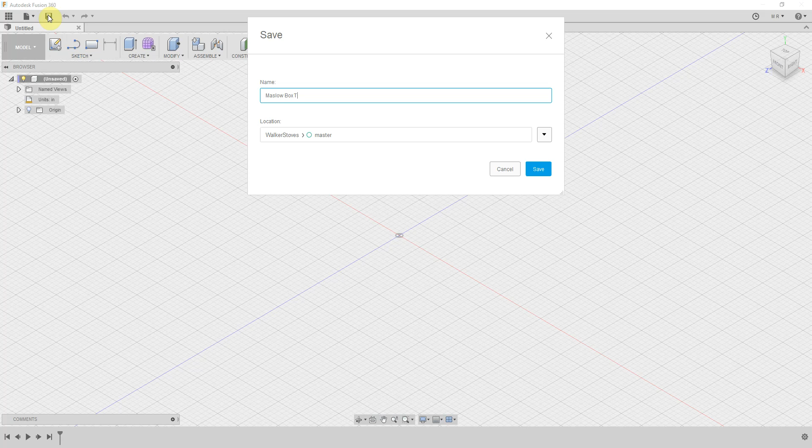Okay, so we've got nothing going on here, starting from scratch. There's a couple ways to go about this - you can start just by making a new component that is your first panel. I've done it a few different ways, not sure what the right workflow is, but I've been starting with a sketch, then creating a body, and creating a component from that body. So I'm going to work from there.

One thing we want to start with - it's really easy if we keep our Z, in my opinion, pointed towards me, because then when I get to the CAM stage, that's how its contours are going to look. So I make it so front Z is pointing towards me, X and Y are just as you'd picture, horizontal and vertical. And that's how it defaults.

So here we go, we're going to start and make a box. The first thing we'll do is go up here and do a 2-point rectangle. If you go into the sketch, you can select rectangle 2-point, or just click on that icon - either way. And before I start, we should talk about preferences, I suppose.

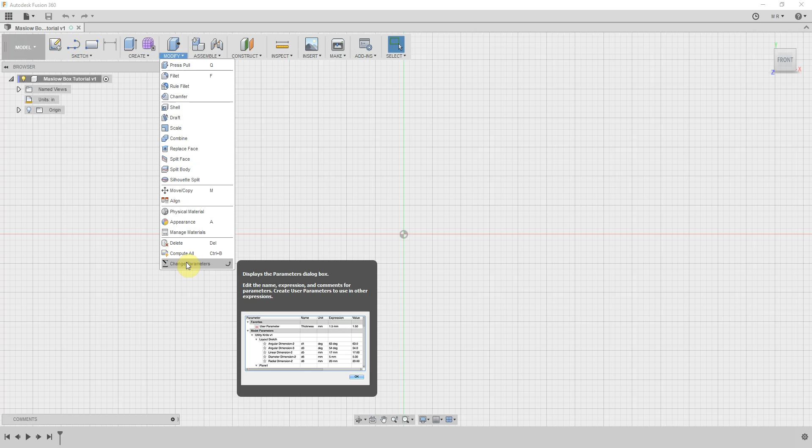Or parameters, rather. If you go to Modify and down to Change Parameters, you can start your whole project with parameters. Click here, User Parameters with a plus, and here's the handiest one - I haven't been doing this, but it's probably the right way to do it. Thickness is a great example. Unit is in inches, and in this case let's say we're going with 1/2 inch thickness for our stock.

Now why that matters is because that's going to change how long the tabs are. In the case of something like this where we're planning joints, if we wanted to cut this on 3/4 inch material later, that would change the outline of our contours. So it's a good idea to use these parameters - you can keep going, do height, width, overall, anything you want. But I'm just going to leave it at thickness for now, since I tend not to use that too much - I'm designing on the fly and don't really know my parameters right out of the gate, but it's important to know that's there.

So with that said, we'll go back to 2-point rectangle.

I think I'm going fast again, so I'll try to slow down. So, 2-point rectangle, sketch, 2-point rectangle, we're in the Maslow box tutorial. This little dot here indicates that this is the active component. It's not actually a component, it's the project, but that's okay.

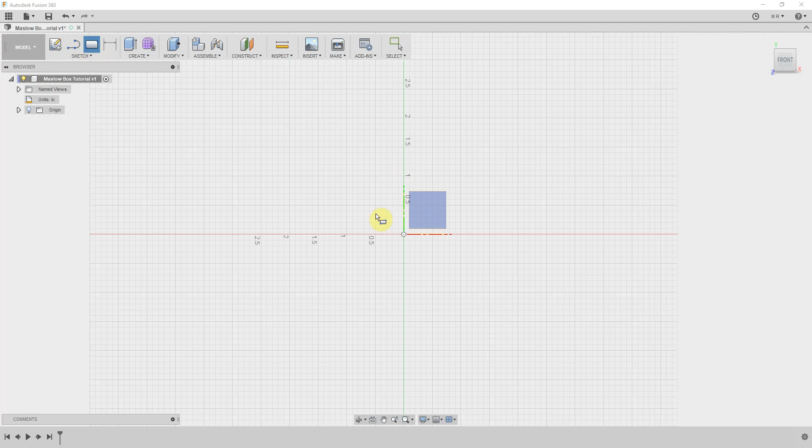So 2-point rectangle, we're going to go here. They're going to ask us to choose the plane, and this gets confusing. If you click in the wrong spot, it'll spin everything around. So you want to just select this face so that it's still going to remain oriented the way we want it, which is looking at the front.

And then I'm just going to start with the first corner right in the origin. You place one corner and your next corner, and it doesn't matter how big you are, because what's going to happen here now is, now that I've done that, if I get out of there now...

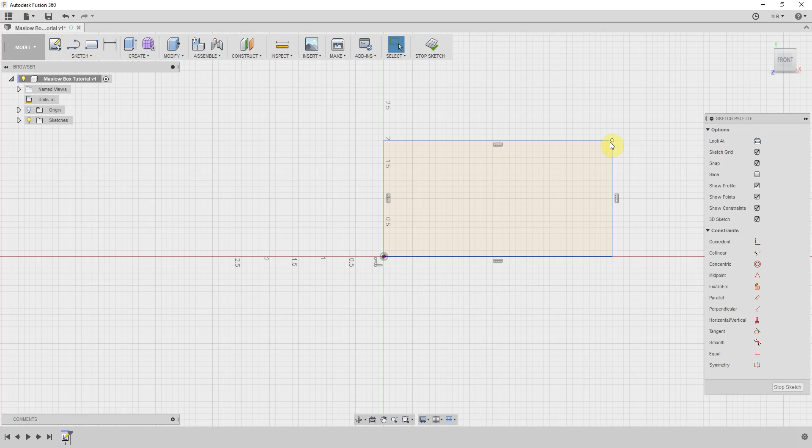Oops, I'm sorry, I did that wrong. I'm going to do that one more time. Try it again. Okay, so first corner. Next corner, I'm going to single click there. Oh wait, I didn't want to do that. That's what I'm doing wrong. Okay, sorry about that, guys. I'm going to control Z. Okay, one more time. See?

I'm a rookie. Okay, so what I'm actually looking for is the blue. I can't move my cursor to show you because it drags the thing, but you don't click. You just leave this floating around, and then you'll notice that highlighted in blue there is the vertical axis. So what I like to do is just drag that out, leave it, don't click, apparently.

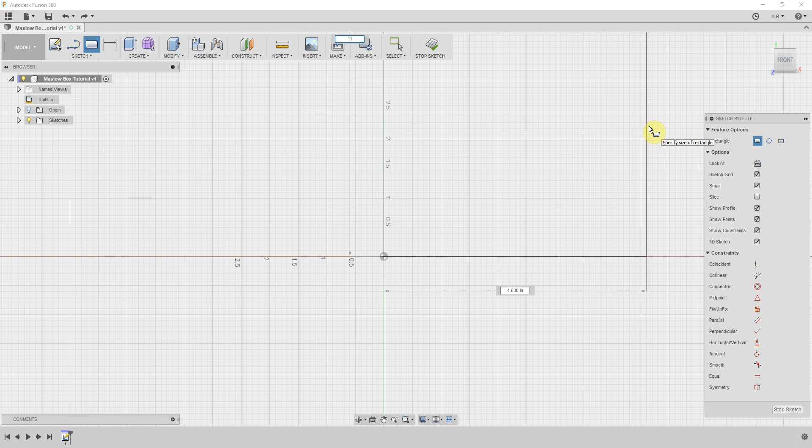And then what we'll do is we'll enter our box size. So let's say we're going to make a box that's about as big as a piece of paper or something, so it's going to be 11 high. Okay, and then we can't see that anymore, let me scroll out so we can see it. And of course now it's all going haywire.

Start again. So 11. Okay, now I can go tab, and it's down there, and we'll go 8. Okay, so when I tabbed out of the 11 over there, it locked it. Now the 8 is down there. If I tab out of there, it'll lock that.

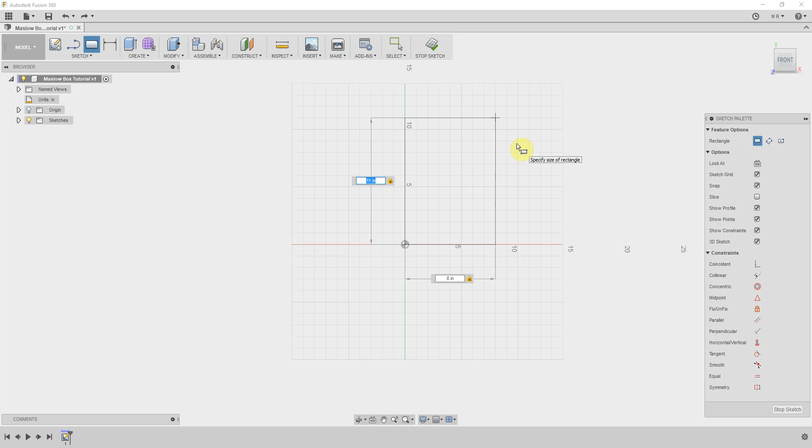Now if I move my cursor, things don't... oh, yes they do. Okay, so we're just going to leave it alone. Alrighty, now I can push enter though, and it'll be the size I want. Okay, that wasn't too hard. Took me a little while to figure it out.

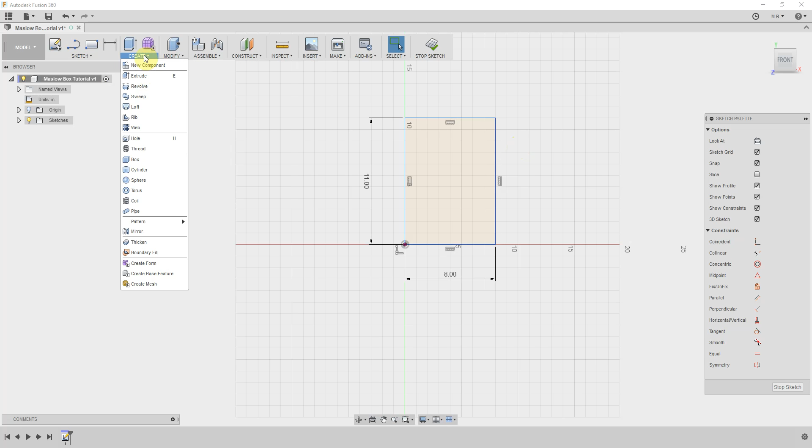So right from there, I will typically extrude that, meaning right now it's just two-dimensional, but I'll bring it into 3D, and I'm just going to push E. You can also go up here to create, and the first one is extrude, or this box also means extrude. So I'm going to go E for extrude.

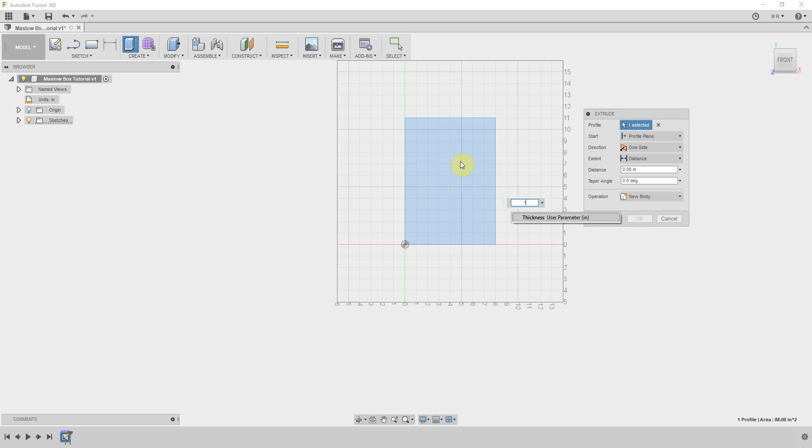And then over here is your little menu here, so it says select, so we're going to extrude this profile. Again, without another click, we get the blue in the depth, so we're going to go 0.5, half an inch, right? But in this case, I can type in thickness, user parameter, and see, there it is, right there. And that's it, so I'm okay with that.

We can take a look at it from the side and make sure that we got it. We did.

Okay, so there's our first part. So now that piece, when we click here, you'll see this is underlined over here. Okay, that means that's what we're looking at. So if we expand this part of the tree, we can see that this is body 1. Okay, so now from there...

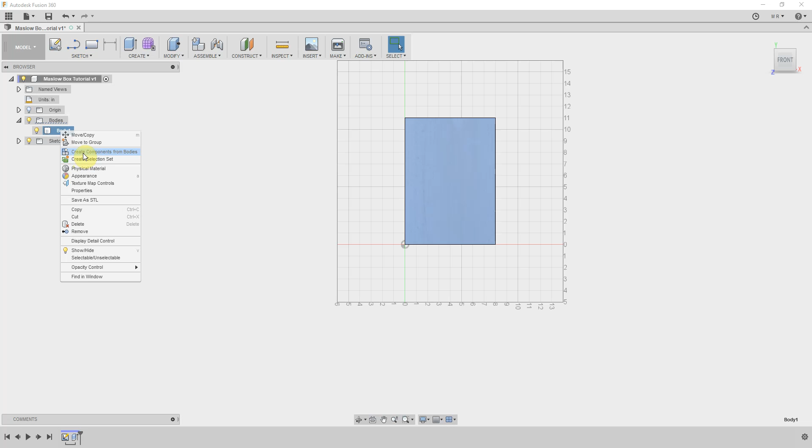I think I'll take that and I'm going to create a component from body, and I'm going to name that component just so I know what I'm dealing with. Front. And there we go, so there's my first box panel.

So now it's actually probably going to be the back because I'm going to draw on it from here and bring it this way. So we'll call it the back.

Alright, so the next step, it's not activated. You'll notice here this doesn't have a dot in it, and I'm going to keep it that way. I'm going to keep working in the main thing because I'm going to draw the next component now. So there's a couple ways to do this.

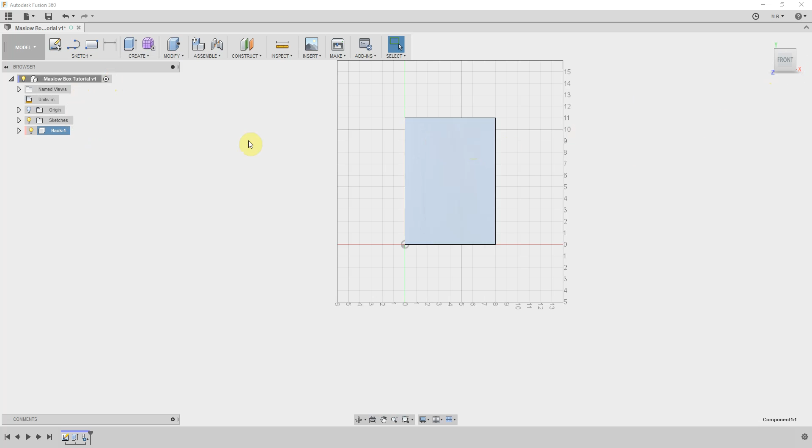I still haven't figured out the best one since I'm paused. I think what I'll do is go 2-point rectangle. Now it's going to ask me what plane, and if I select that body, it will mate it to that plane.

So now that I've done that, I can choose this corner, and I'm just going to go down. I learned I don't need to click here, so I'm just going to float it on that line. Now the width up there that's highlighted in blue, I want that to be my thickness, so I'm going to do that.

Oops, I didn't do that right. I'm trying to do that again. Oh, I can leave that there and do that again. I don't know how you do that, guys. Oh, there we go. Thickness, enter.

Tab. Thickness, enter, tab. So that will select the auto selection. And then the height - well, my height is 11 inches, I know that. And now I'm going to enter.

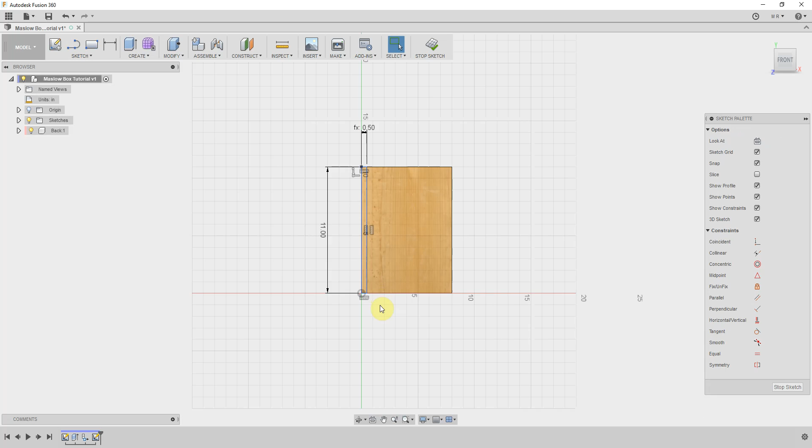And now I'm going to extrude. I'm going to select that guy and extrude him. He's coming towards me now, so I'm going to go 8 inches. So it's going to be an 11 by 8 box.

And I'm going to rotate and make sure that I got it. And there it is. Is it made in the right spot? I like how it is. Yeah, you can see that seam back there, I think.

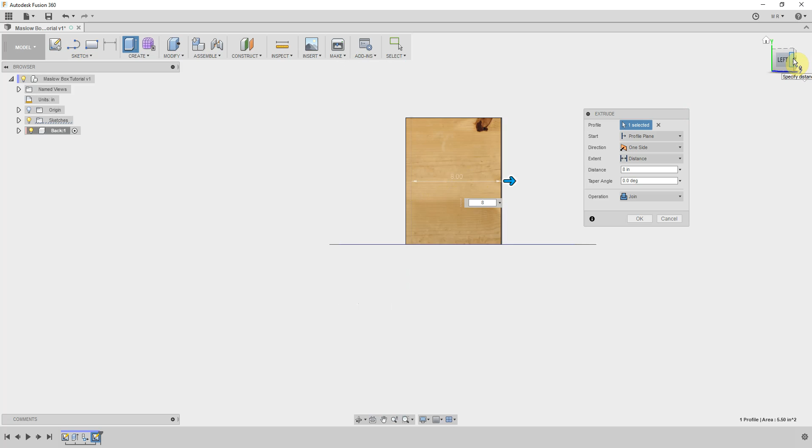So I'm going to think that's okay. Now I was looking at it at 90 degrees. There we got 2 pieces, just like we're supposed to.

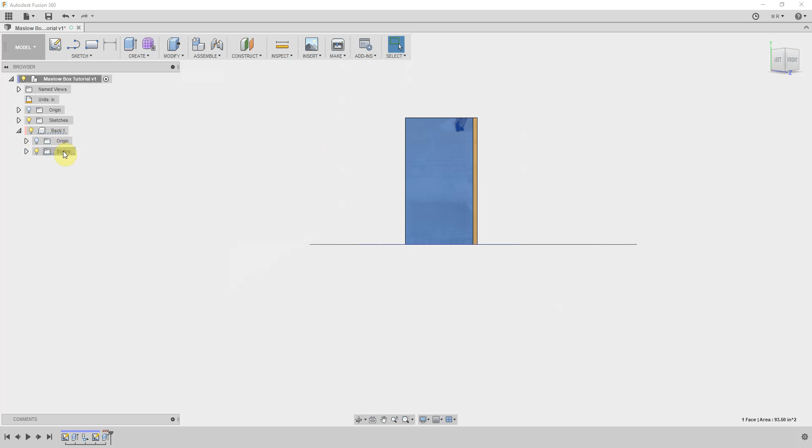Okay, so before I do anything else, I'm going to take that piece, and apparently it's created as a body within the back, regardless of the fact that I was building it up there. But that's okay. Got it selected here. I'm going to right click, and go create components from bodies.

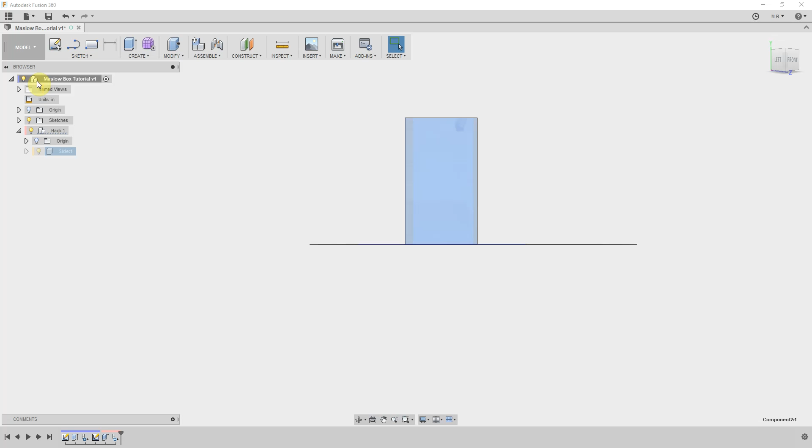And now it's component 2. I'm going to need a side. And just so it doesn't exist within the back, you can grab them here and move them in the tree, and I'm going to put it in the overall project. You can see it just moved over. So now we have a back and a side.

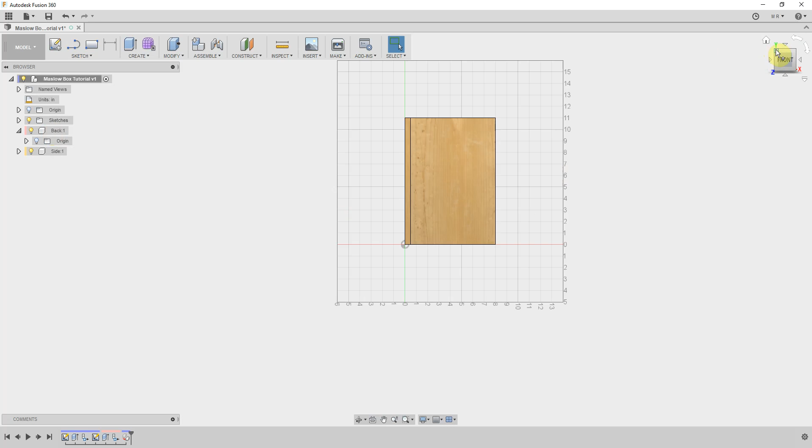And now we're going to create our joints. So in this case, the way I joined them is that the side - maybe I did it wrong, guys.

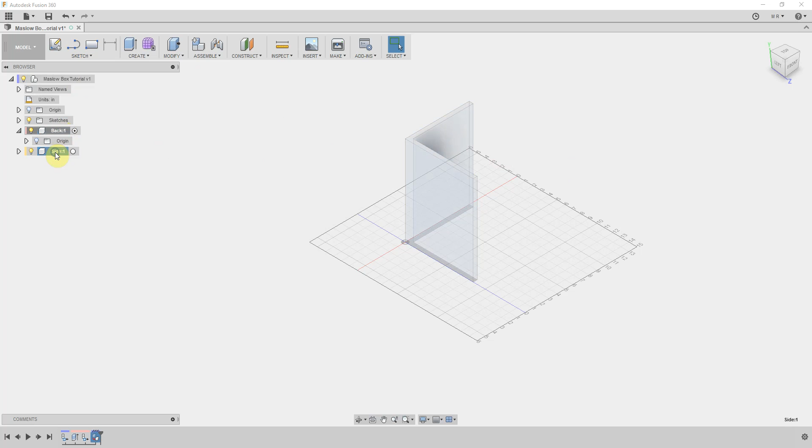Well, let's take a look. Okay, here's what I'm going to do. We're going to activate the side and isolate it - right click, isolate. Yeah, we got the whole thing for some reason, so that's not what we want. So I did that wrong, probably because of the way I joined the face when it was on the back and extruded.

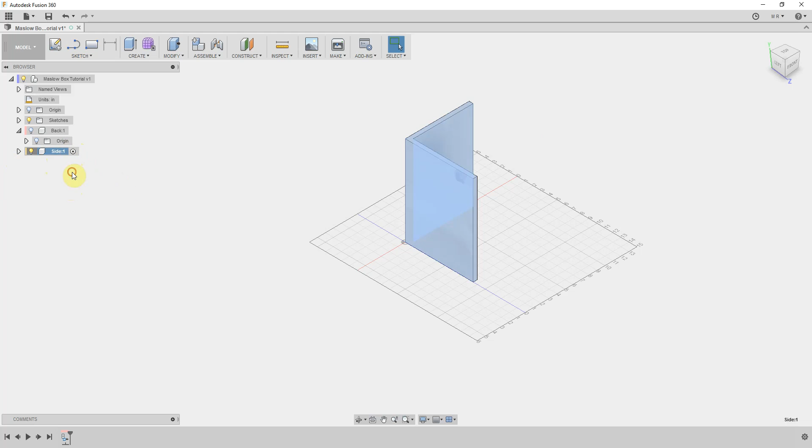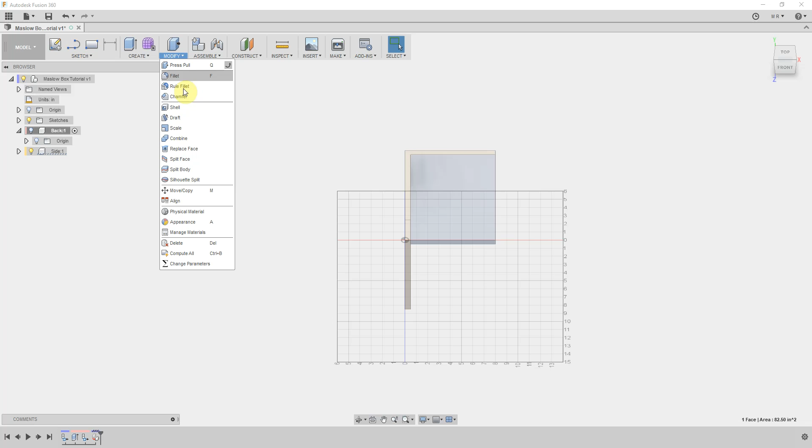Well, that's okay, that'll give us a chance to do something else that I learned how to do. Okay, so we can split these. So we're going to split body - body to split, one selected. Splitting tool, one selected. Let's see what they chose.

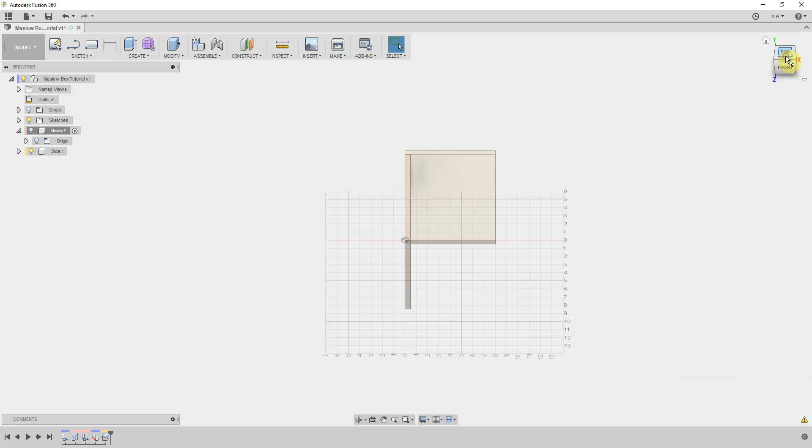They chose that face - that's exactly what we want. Okay, so now we have 2 bodies. Back one, and within... there we go.

Alright, well, I don't know what I did, guys, but I'm going to redo it. So I'm going to take this body one, and I'm going to create a component from that body. I'm going to move that up to there. I'm going to select it and make sure it's what I want. And it is, so I'm going to name that.

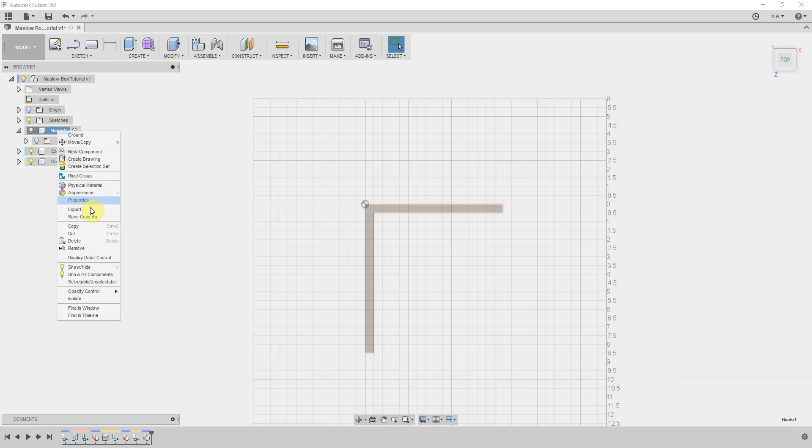I'm going to leave it for now. Body 2, create component from body. Now it's component 4, put that in there. Okay, now let's see - I should be able to remove side 1. You don't want to delete them because they'll mess up your timeline, but if you remove them, then they go away. And now we got the pieces we want, selecting how we want.

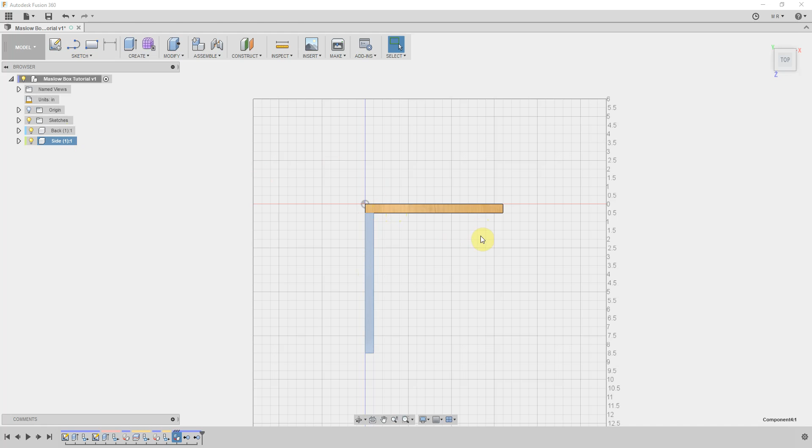Okay, well, sorry about that, but I guess we learned something. I was going to just stop and start over, but I think that's probably useful. So if I had drawn that sketch that I extruded here, when I made that joint, what I did was I extruded from this, and it pulled the whole thing out and made it one piece, which is good, because sometimes I need to do that too. But in this case, we want 2 panels.

Okay, back to where we were hoping we were.

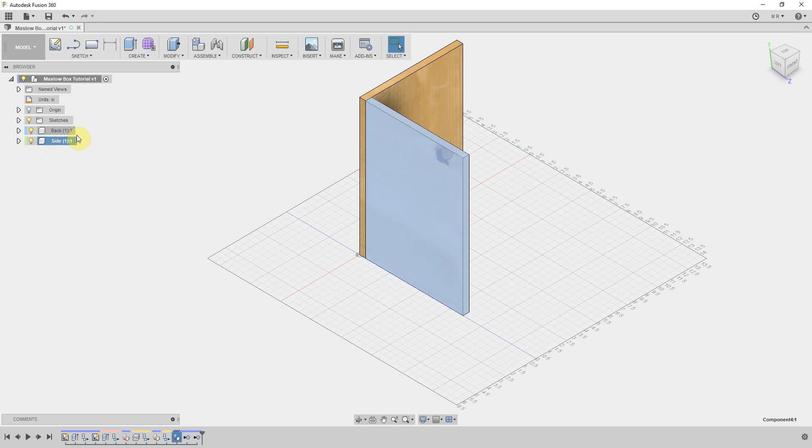So what I wanted to do was take a look at this and say, well, this one needs to extend into this one. So if I'm going to make tabs that are a joint, I'm going to work on this smaller one here, which is the side. I'm going to activate the side and isolate the side.

And then I'm going to take a look at it from here, and we're going to quickly use that 2-point rectangle again, and we're going to select the face. We want to just select our guy we're drawing on. Now in this case, when I made a mistake last time by selecting that face and it joined it to them when I extruded, that's exactly what we want here.

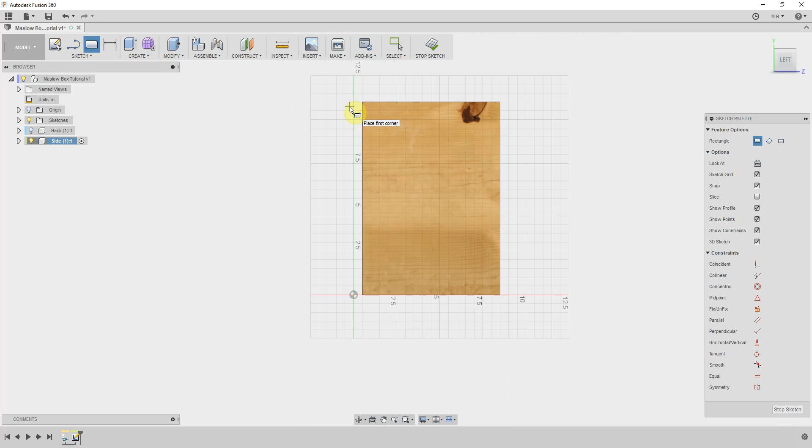So here's what we're going to do. We're going to put a first corner on the line there. We're going to go like this and just leave it, no buttons. And then it is at 1/2 inch, but I want to put thickness. So we go thickness, enter, tab.

Now I'm just going to leave this as however long it is right now. And I'm going to click. And I'm going to do that again while I have this command, and I'm going to say that I want 3 of these.

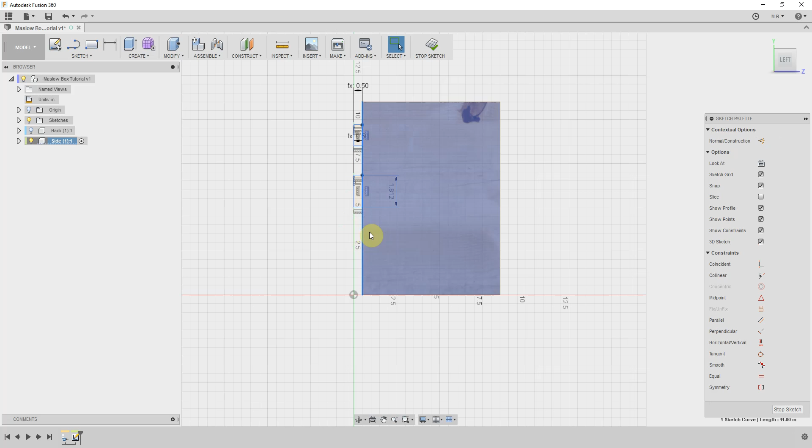Thick, enter, tab, enter. Lost my rectangle control, so we'll do it one more time. And thickness, enter, tab, enter.

Okay, so those are all different sizes. That's probably kind of hard to see, but they're all different sizes. But the reason I do that is because then I'm going to go and use this sketch dimension function. And what I like to do is, depending on how many tabs you have, if I want these to be evenly spaced, I'll just count how many spaces I have here. So I have 1, 2, 3, 4, 5, 6, 7. So there's 7 gaps in this 11-inch length.

So what I'll do then is I'll take this dimension, and I'm just going to click, click, and then without touching anything, slide out to the left and it'll show you that dimension, and then click one more time and it gives you that. So I said I had 7, right, into this 11.

So this is one of the coolest things about Fusion that I love, is I can go 11 divided by 7. Now I'm going to Control C, copy that because I want to reuse that, and now I'm going to push enter. Okay, and it just made this dimension from this corner to my tab.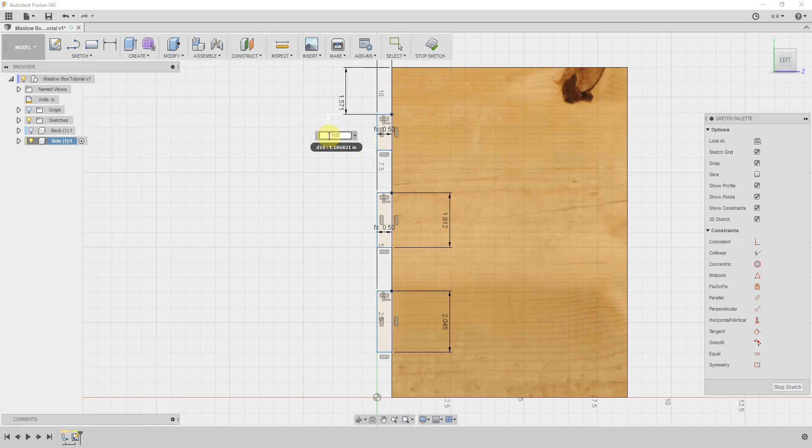1.571. Now I can just grab this tab, one click, pull it out without any clicking, you're not touching your mouse, and then click again, and then Control V, 11 divided by 7, enter. Here to here, I want the same thing.

I'm not holding anything down or clicking now. That took me a long time to figure out. Control V, enter. Click once, let go, slide to the left, click again.

Okay, so it says I'm over-constraining the sketch, so I'm going to cancel that, and the reason it's doing that is because it thinks that I've measured all of these, but I haven't measured this one. But that doesn't really matter.

We're going to go to here. Oh, actually it didn't let me do that, but I can double-click, Control V, use that, and I think it was because these are too long, and it wasn't going to fit.

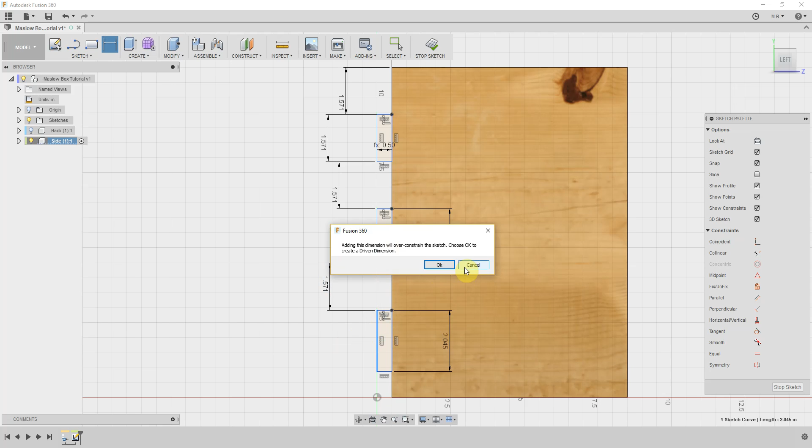Oh, I see, it's because there's already dimensions here that it thought were real. So we have to change the ones that exist, not add one that isn't there. There we go. Control V, enter.

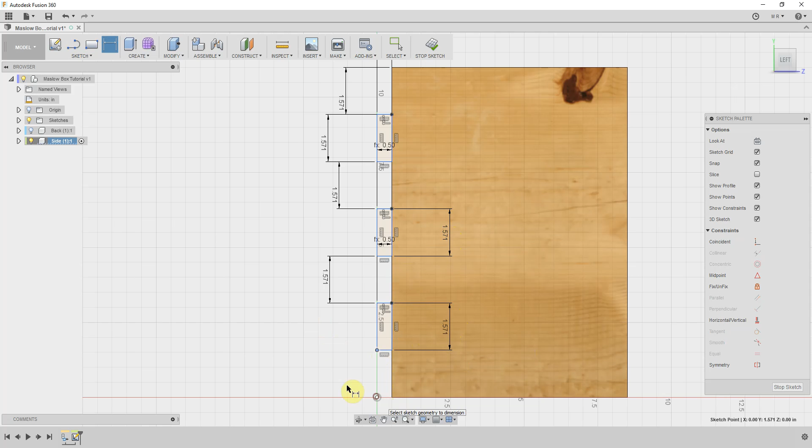So what you can't do is you can't dimension the last one. It won't let you, because then it's dictating things that are constraining to the whole thing. So there we go, we got 3 evenly spaced tabs, 4 evenly spaced spaces. So we like that. If this were going to be a full box, we'd want to do the other side now, but I'm just going to do this for now.

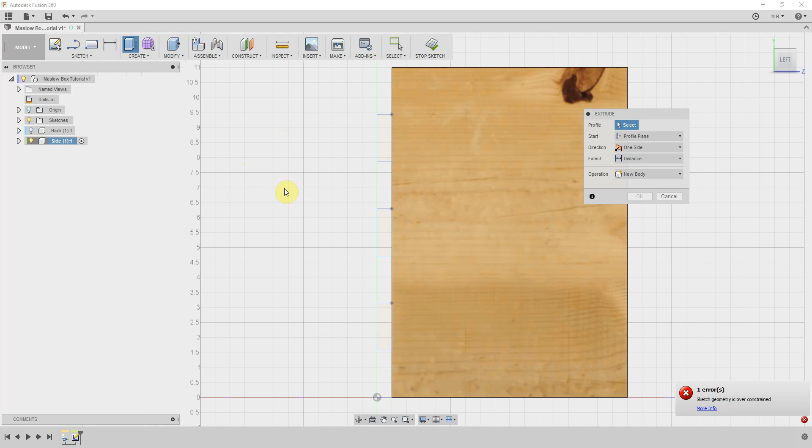So now I'm going to extrude. We're going to push E again, extrude, and it's asking us over here to select. Fusion makes it real easy. It just knows I'm not holding shift or control, I'm just clicking. And then it's already asking me to say how deep.

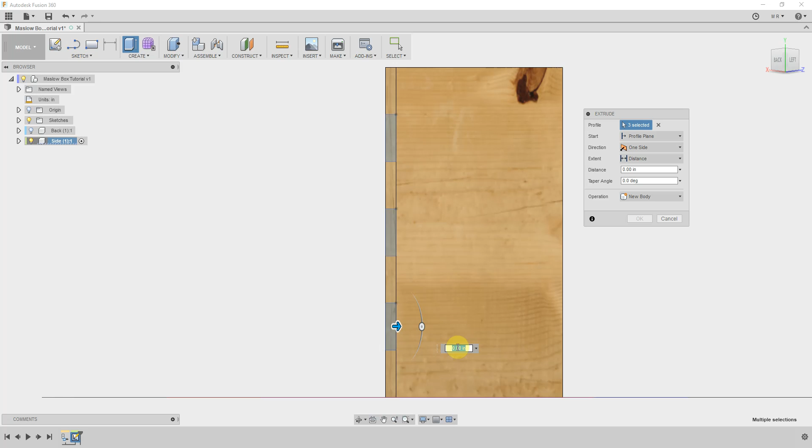I like to just make sure that I'm going the right direction. You can see it's going to default to pull these the wrong direction. So I'm going to put my cursor in here and I'm going to go negative thickness.

Enter. There they are. They're the right size that way. Okay, I'm going to enter again. And there we have it.

Alright, gang, we're getting close. This is a great time to remember to hit save. I learned that the hard way. My computer struggles with this program.

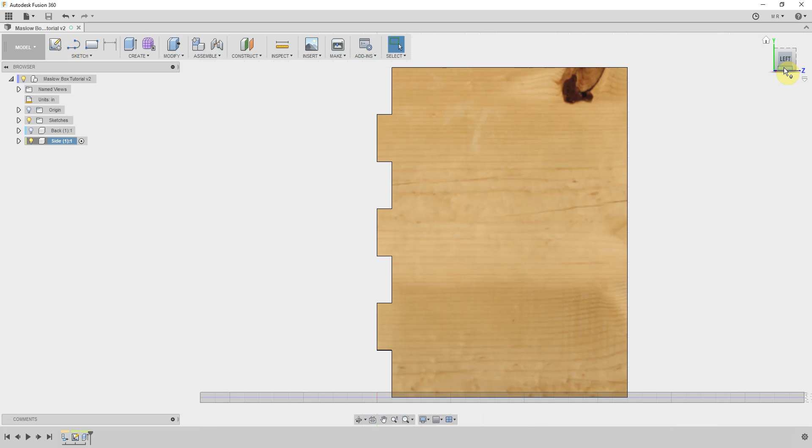Now, another lesson I learned: if you cut them like that, they won't fit. Tabs have to be a little smaller, right? And I'm still learning what a little smaller is. But it seems like 0.125 is an eighth, so 0.06 is a 16th. So I was going a 16th, but I'm going to go a little bigger. I think I'm going to go an 8th. It doesn't really matter because we're not going to cut this. I'm just going to show you how I do it.

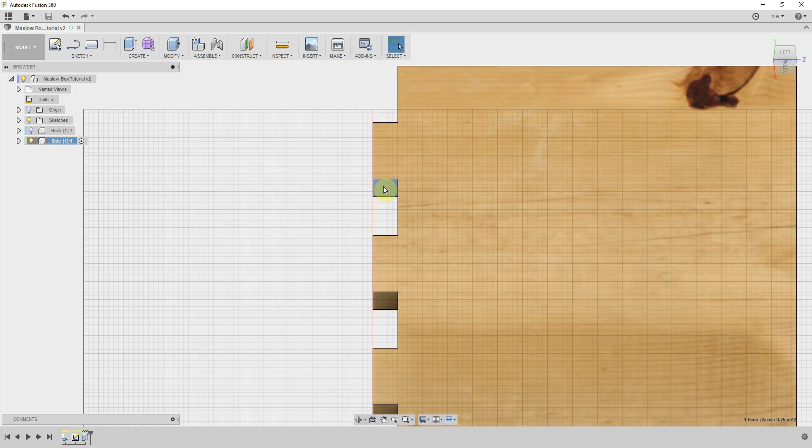So we're still working on side 1 here. What we want to do is make these a little smaller. So we're going to modify, press pull. You can see the command is Q. I'm going to come down here and use Q. I like to zoom in and select this little face first, because then it knows what kind of press pull I want to do. Otherwise, you're going to get an edge and it'll think you want to do a fillet. See the arrow right there?

Great, so now I want this one as well, and I want this one too. But they're going the wrong way. See, I'm highlighted in blue down here, but they're going the wrong way.

Now I want my total gaps to be, let's say, 0.12. So I'm going to go half of that right here. But I've got to go negative, so I'm going to go negative 0.06. They moved ever so slightly. And I'm going to say okay.

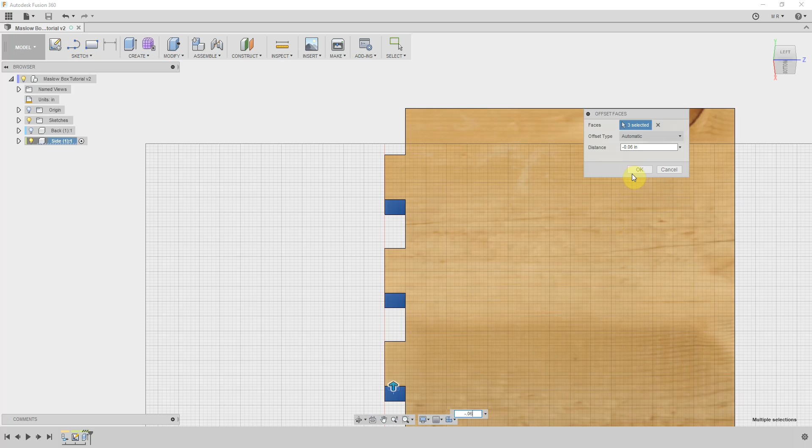So I know I just did these ones. Now I'm going to go over to the opposite, and we're going to do the same thing. Highlight that face so it knows we're working on that face. I'm going to go Q, select the others, and go negative 0.06.

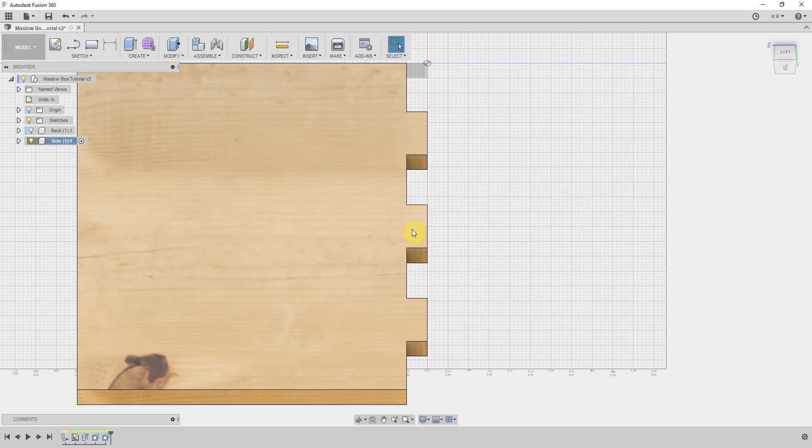Okay, you guys understand what I did? What I did was I just removed the distance from here to here by 0.12, by pushing each side in 0.06. Alright, we're getting there.

One last thing to do, and that's the dog bones. Now, Fusion has a dog bone add-in. Someone made it. You can go here to add-ins, scripts and add-ins. You can find that online and download it, put it in your add-ins folder, and here it is, dog bone. If I click this and push run, it'll put a little icon up here, and I can try to make it work to automatically create dog bones. I haven't really had much luck with it. I had it work once or twice, but it took as much time and didn't offer very much control.

So I've taken to just doing them by hand, and it's actually really easy. And they're not really dog bones anyways, because I think they offer a better glue surface. So here's what we're going to do.

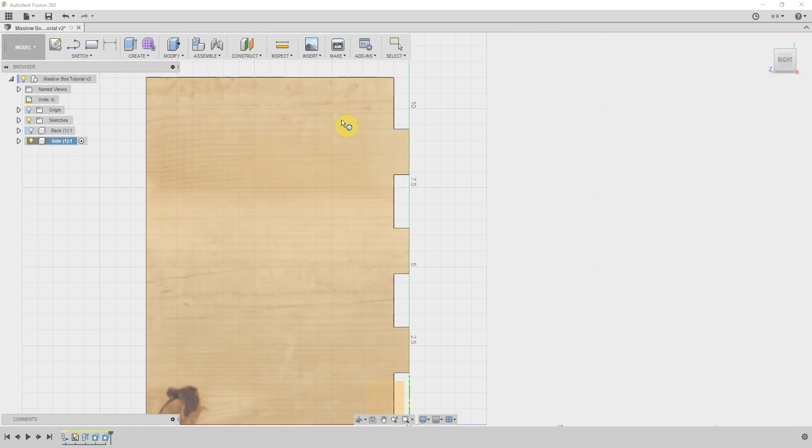We're still working on here. We're going to come over to sketch and go circle. Now if we wanted to do a real dog bone, we could go center diameter circle, but I've been going 2-point circle. All we do is put one point in the corner. Oh, we need to select a face or plane, so we're going to select our working face. Drag it to where I can see it. I'm going to put a point in the corner, and then just kind of go the direction you want to go.

Now I still have my circle tool, so I can just do that again. Should still have my circle tool. I guess I don't. Sketch, circle, 2-point circle. One click there, no click there. 0.26. Enter.

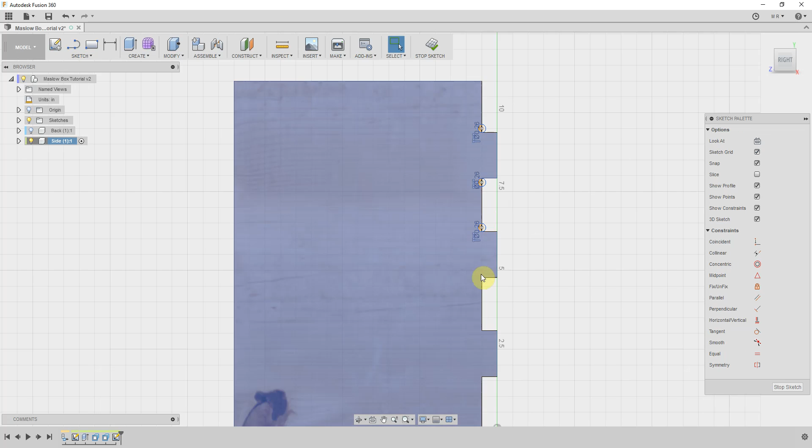Okay, so if you want to repeat the same function, you can right click and go up to repeat 2-point circle. Click once, no hold, the direction you want to go, the size you want, enter, enter. Right click, repeat 2-point circle, place your first point, the direction you want to go, the size, enter, enter. Right click, repeat 2-point circle, the first point, the direction you want to go, 0.26, enter, enter. And one more.

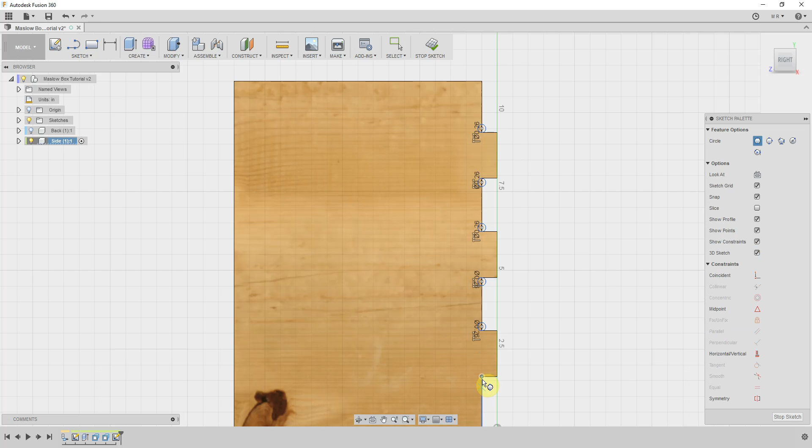And you guys are saying there's got to be an easier way. And there totally does, but I don't know what it is. So here's what I'm doing right now.

Okay, there's all our little circles. Now I'm going to extrude them one more time, so I'm going to push E. Before I do anything, I'm going to come over here and see where it says new body.

We don't want a new body, we want to use those guys to cut that body. Now Fusion's pretty smart, and I learned that if I click these, it's not going to click the whole circle. So you got to make sure you're on the hemisphere that is on the body that you want to cut. And again, I'm not controlling or selecting, it just knows I want all of those.

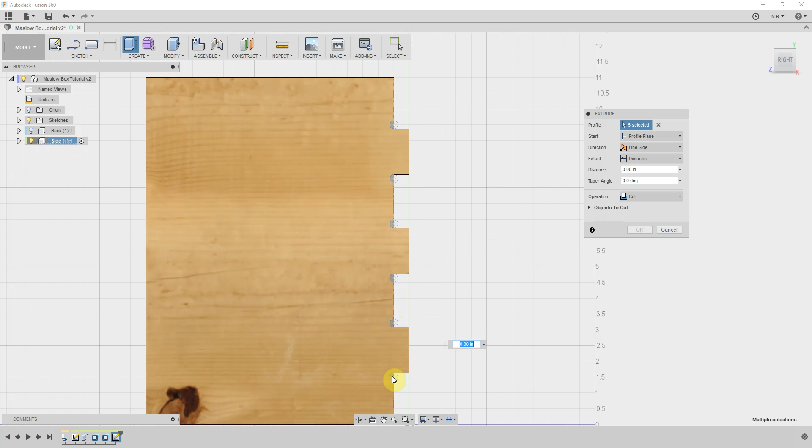It says right here, 6 selected. If you zoom in and kind of get away, it shows you that they're colored. That way, if we go on edge here, we'll see which way they're going.

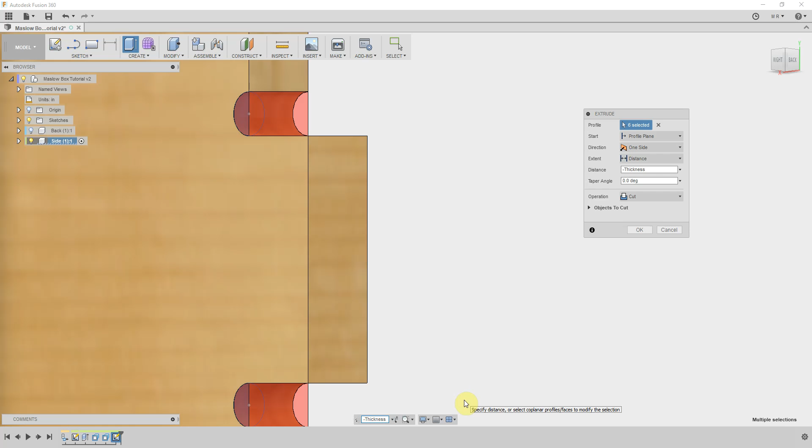Here's our depth gauge here. So we want to go negative thickness. Enter. And there you can see they're modeling our cut for us.

I'm going to zoom out and make sure I selected all of them, all the right ones. I think I did. And that looks good to me, so I'm going to go OK.

And there we have it. Except I think I made a mistake, you guys. Because I'm going to put this in the other one, and that's probably going to make funny cuts into our other sheet. Maybe not, we'll find out.

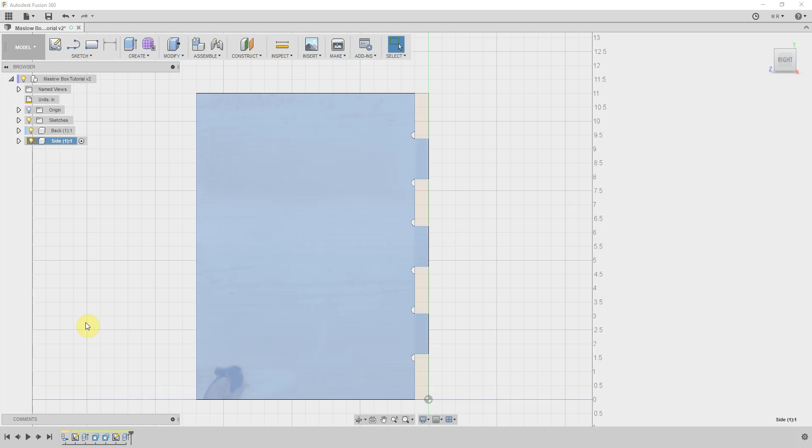Okay, so that's the end of that sheet. So we got that. Let's unisolate this. Right click, unisolate, and now it's there hanging out with our other guy. Oops.

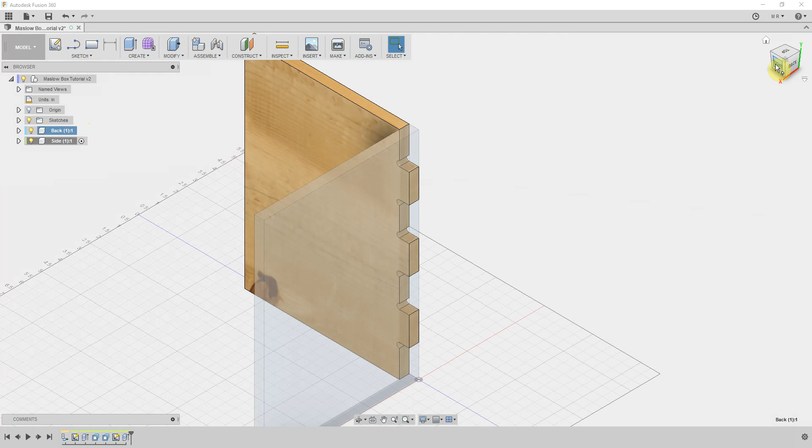And you can see he's kind of being pierced by that. So now what we want to do is we're going to do a cut operation using this guy as our tool to cut this guy.

So this is the side, this is the back. We'll get to where we can see both. And we are going to modify...

Combine. Operation is join, but it's not. We want to cut.

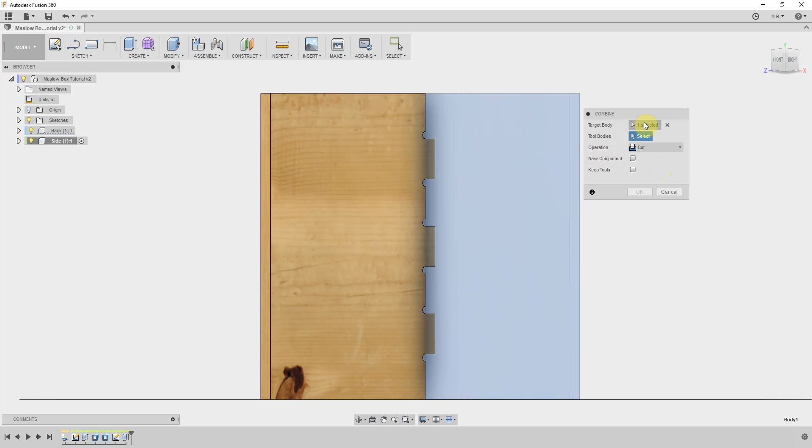Target body, that's this one. That was already highlighted. It asked me target body. Here it says tool bodies, select tool body, that's this one.

We want to keep the tools. We don't want to create a new component. I think we're ready to go. Clicked OK.

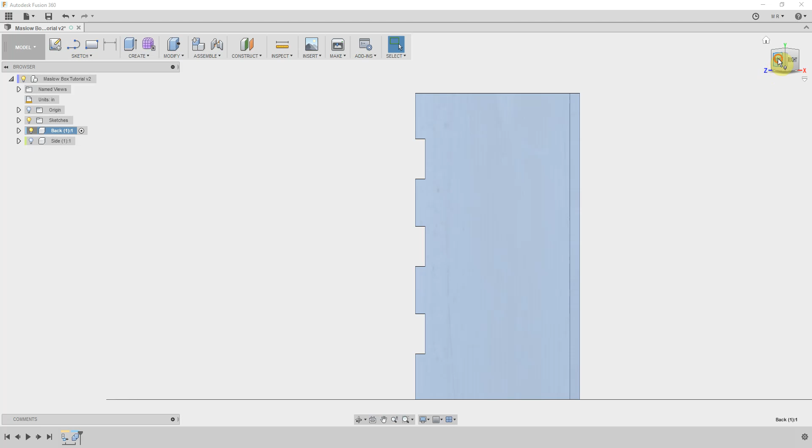Highlight the back, isolate it, and there we have it. So I activated the back here with the dot here. I isolated the back by right-clicking there and isolating, and there it is.

Now we can inspect, measure, and make sure that these are the right size. 1.451.

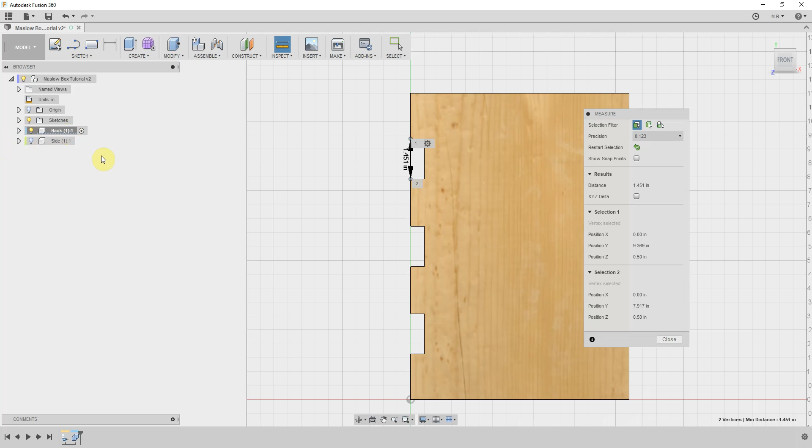Yeah, you know, I should have cut these panels before I pushed those other ones out and before I did the dog bones, although the dog bones don't matter. But see, these are too small now, aren't they, right?

Because if we go over to the side, and we can isolate him for a moment, inspect, and get that down to that measure.

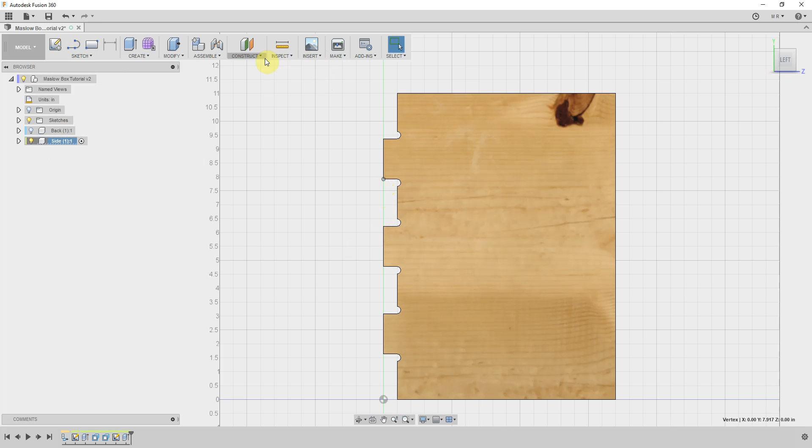You know, it doesn't, it's not cooperating. Oh, sorry team. Like I said, I'm the beginner. Okay.

So that's 1.6, and this will be 1.45. 1. Yeah.

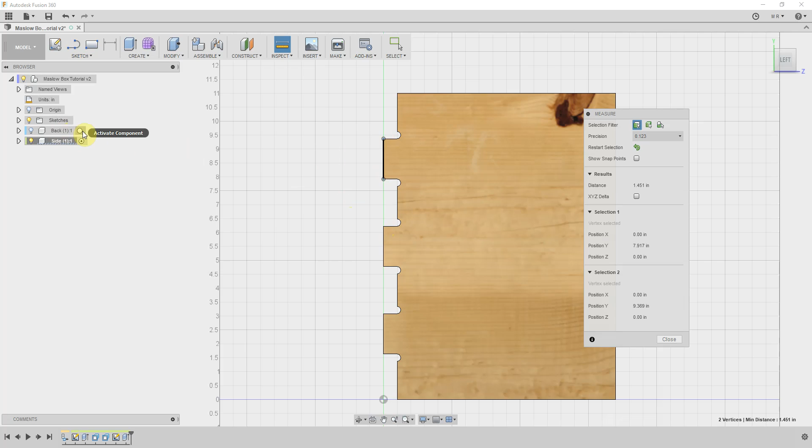So we want to make the back, so I got a double. Isolate these guys, go back to the back, and then isolate him.

So that's okay, we can do that. Alrighty, so lesson learned: make your tabs full size, cut your panels, and then the very last thing to do before we go to CAM is to push our

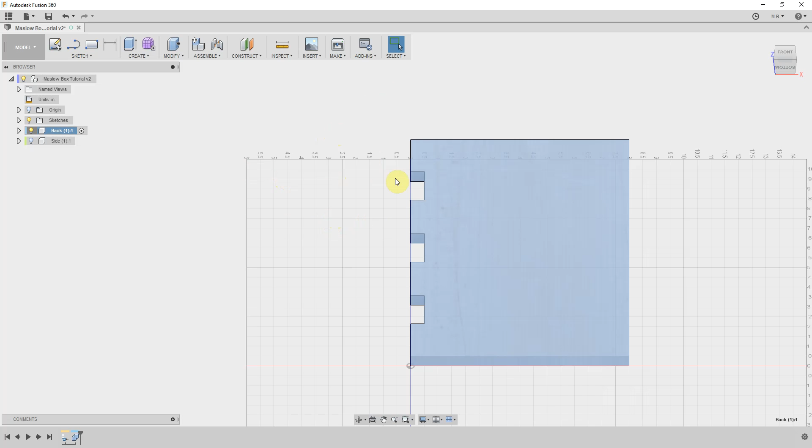gaps bigger and make our dog bones probably. Okay, but in the meantime, here's what we're going to do. We're going to select that face, go Q, push-pull. This time I'm going to double it. I might be doing that wrong, you guys are going to correct me, but I'm going to go 0.12. Last time I went 0.06, and I only did the one there. And I'm getting flustered.

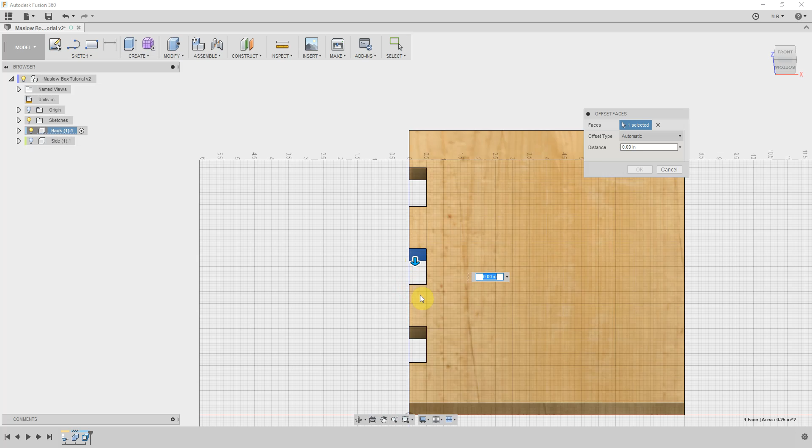Okay, Q, Q, negative 0.12. And that should do it. And then we're going to look at it there, and we're going to do the same thing. Q, and we'll get all three of them. Negative 0.12. I think we got it.

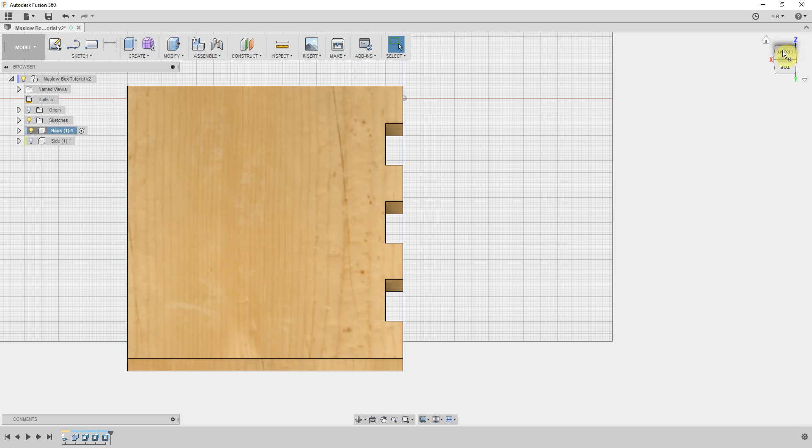And just for fun, we'll measure things. And we should have 1.4 - that's the tab that's going to go in. 1.69 - so the measurements might be a little wonky in terms of how things are going to fit together, but that's that. So then we just need to go back and do our 2-point circles.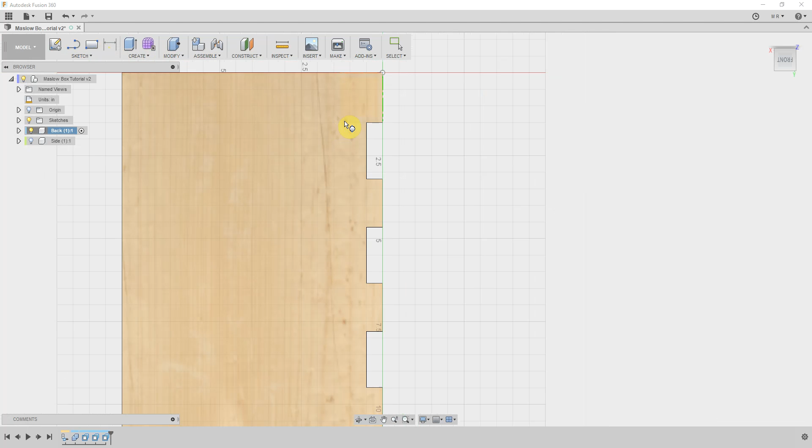So, 2-point circle, we're going to select this face. Likes to flip things around on you sometimes. You don't need to zoom in real close to see this - remember, we're just going to go the way we want. 0.26, enter, enter.

Right click, repeat 2-point circle. Put our point down, 0.26, enter, enter. Same thing here. 0.26, enter, enter. 0.26, enter, enter. 0.26, enter, enter. Not sure if you guys can hear me after all this.

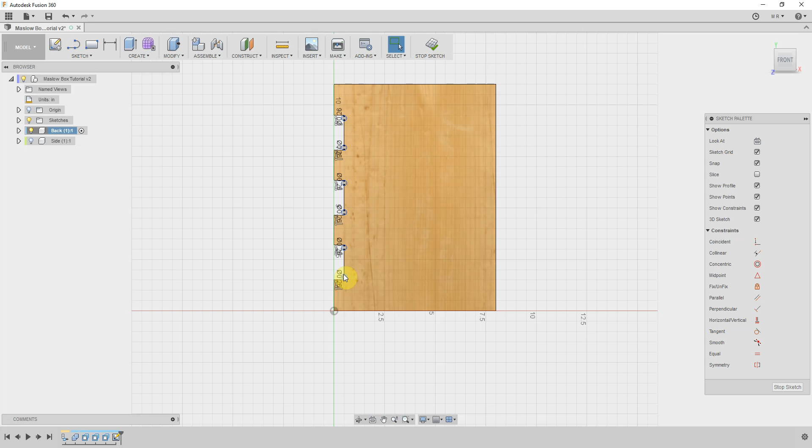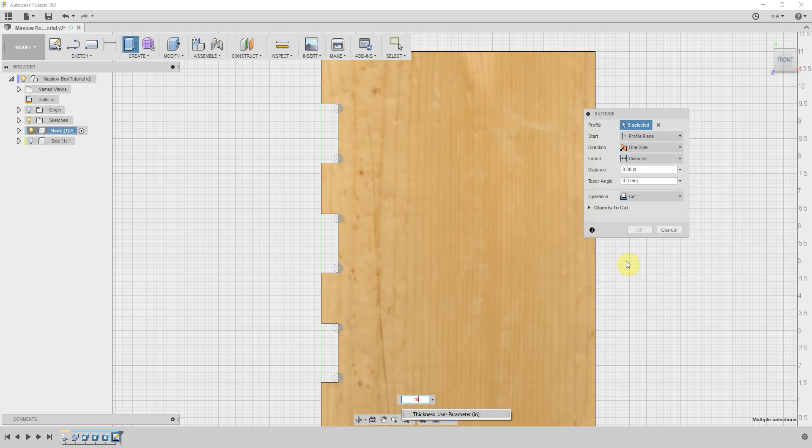0.26, enter, enter. Okay, we got those little circles. Now we're going to extrude them - E, cut, select these guys. We got them, we're going to go negative thickness, enter. Take a look at those - they look right, okay.

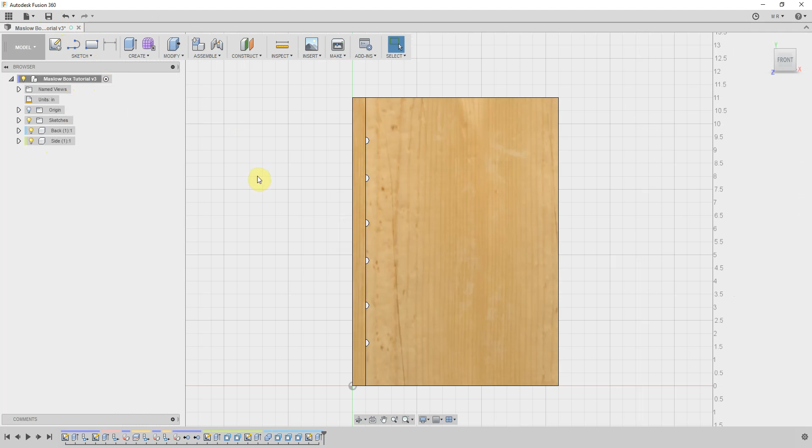Alrighty, great time to save, huh? Now we can right click over here, we can unisolate the back, the side, it is unisolated. Now we're going to come up here, activate the whole project, and that'll allow you to see everything.

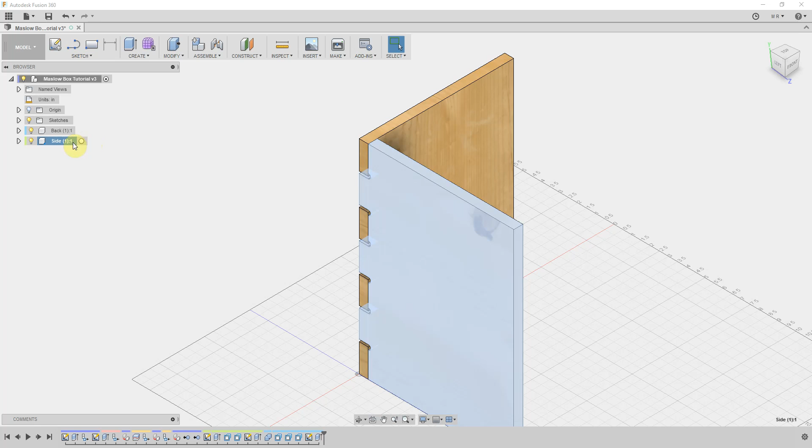And there we go guys, I think we did it. So the last thing I'll do is get ready for CAM by taking this component, any components, and just laying them all flat out on the proper axis. There's a few ways to do this - I watched some complicated videos that were hard. I intend to just go right click, move.

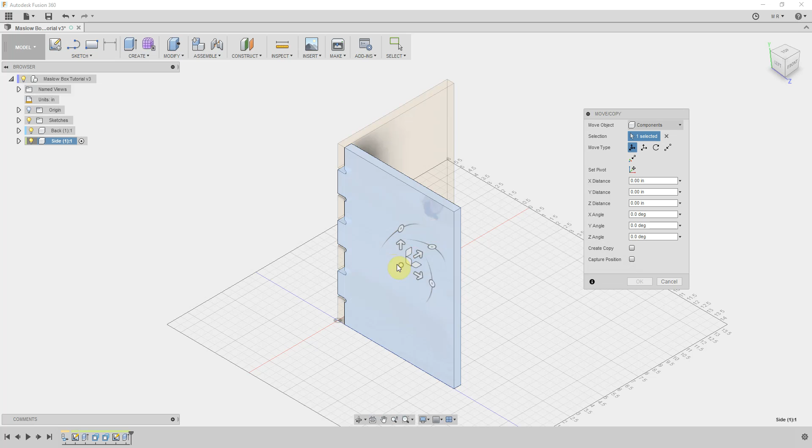Now one thing about this that I don't understand is I don't really understand how you put the pivot point that it's going to rotate around, so I don't want to do that. What I do want to do is move - and see these circles out here? This is going to let you just spin it. Oh look at that, I got the face.

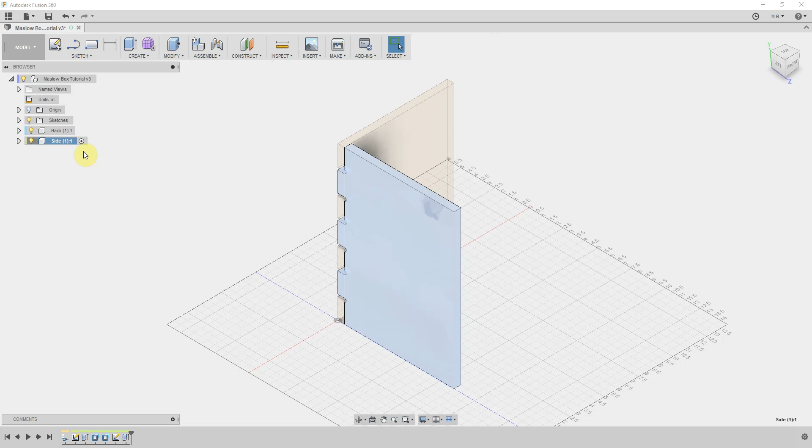You want to make sure you select the whole component, so sometimes it's better just to right click over here - move. Now I got the whole thing. We want this one, we want to go 90. Right? And then we can just, without getting out of there, we can look at it from here. Line it up how we want. And of course it wants to be all wonky.

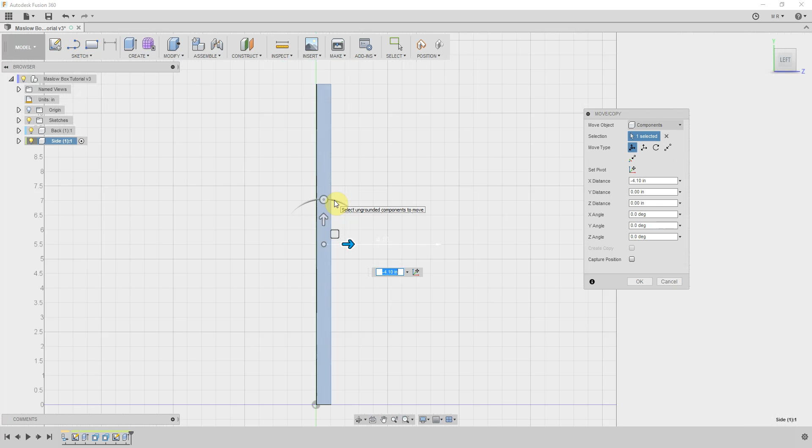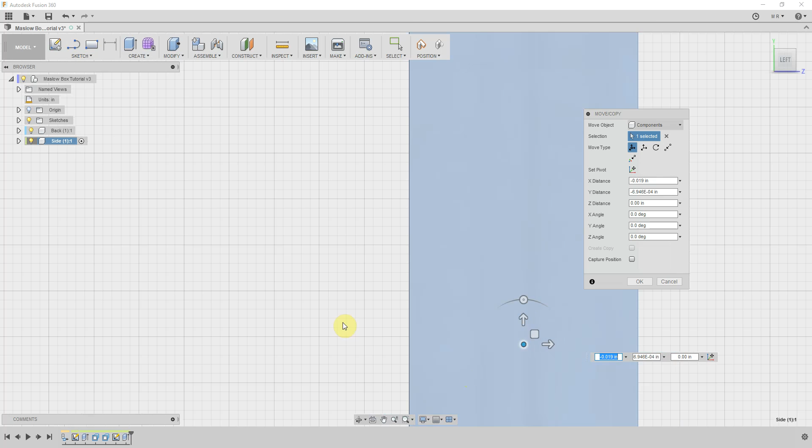So sometimes they'll let you snap the stuff - not today. A lot of this I don't understand, gang, like why that wants to be so hard. Alright, whatever, that's good enough.

And then now we're just going to align them how we want them, kind of in our final cut. That's not going to work, but Maslow could probably handle that with an 1/8 inch bit or whatever it is you might be using. So there we go, there's our two pieces. They are, I think, aligned on the z-axis correctly, close enough that our Maslow isn't going to care.

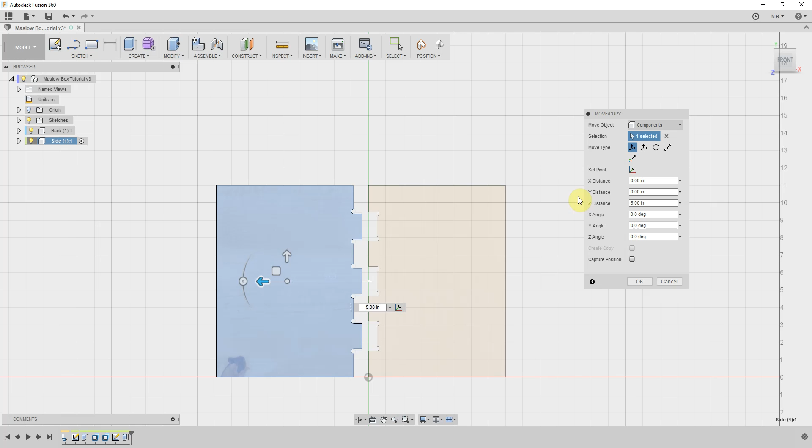You could spend hours agonizing over whether that was perfect. So okay on my move, I like it, everything's good. We're going back up here, going to select the whole project. I'm going to save it one more time, and hey guys, I think we did it. It took a while, but that's how it goes. So I made some mistakes, but maybe that'll help you learn. I took a long time and I rambled a lot.

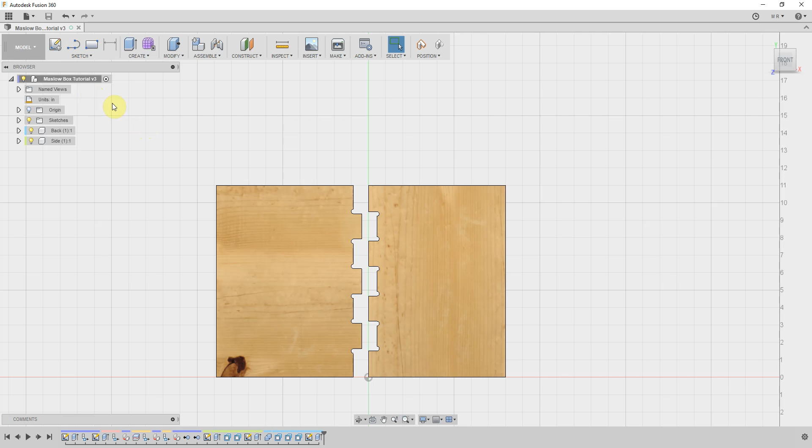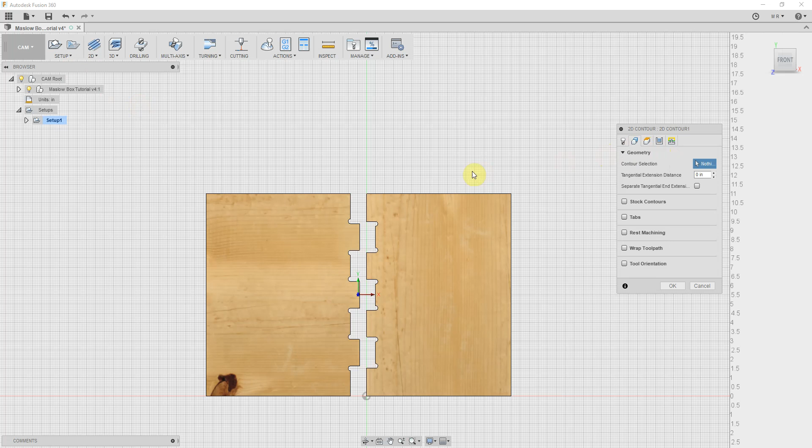So from here, we're in the model space here. From here we just go over to CAM. Now we're ready to start with the video I showed you yesterday, a new setup. I'm not going to go through all this - there they are selected. 2D contour - you're going to have to set everything up, but you'll pick your contours, and boom, we're off and running.